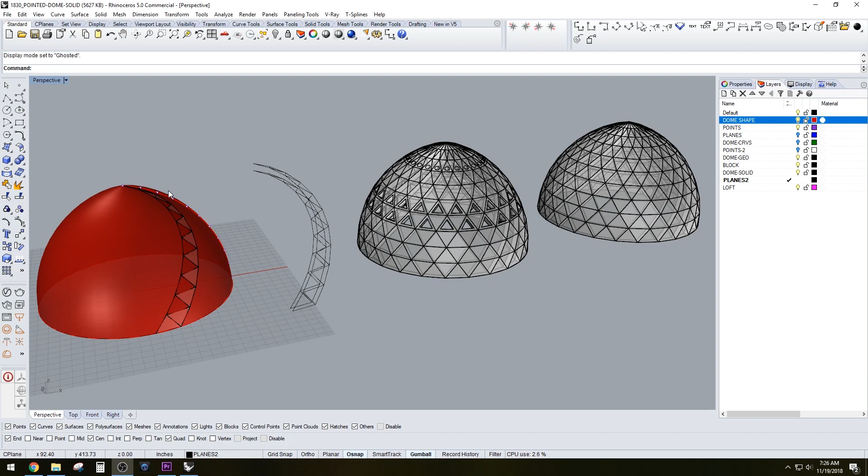Hi everyone, in this video tutorial I'll be going over how to create this pointed dome that is created from a segment that is then offset to create a solid, watertight design.

Let's create a profile and a rail to sweep around to create the geometry of the pointed dome. So let's go to 0, 0, 0 and make it a 20-foot dome, so 120 inches.

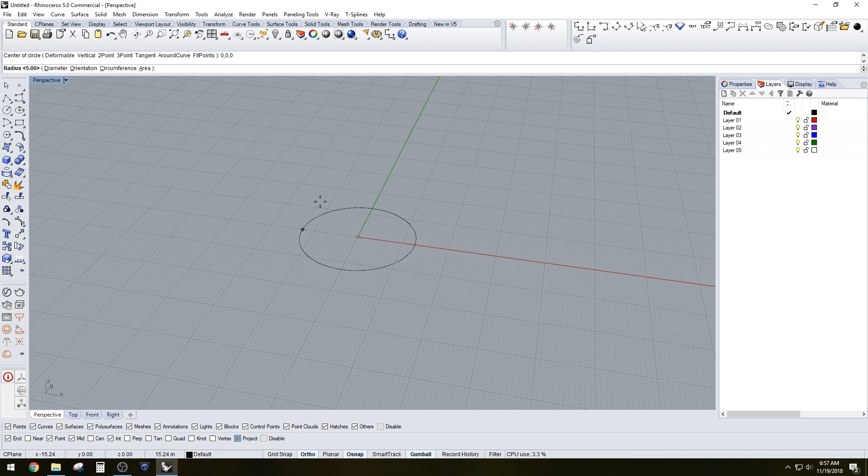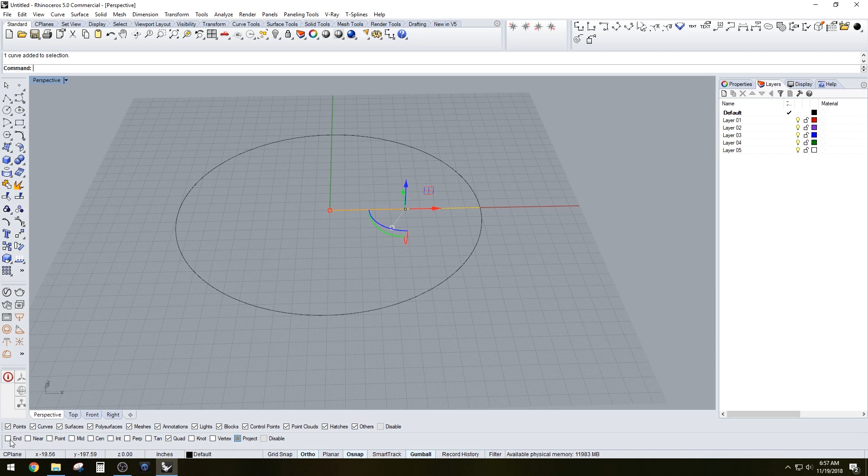Let's create that profile by going to the center layer and also going to the quadrant. I make sure to use these snaps a lot and change them up, also changing the project, because those are really useful for making things accurate and doing certain tricky things. So yeah, that would be project.

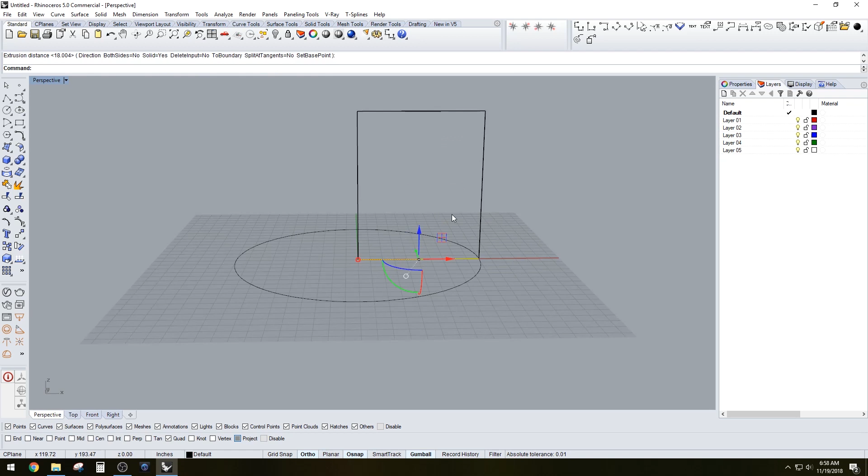Let's extrude this curve and create the height of that dome, which this one's going to be a little tall because I want to make it pointed.

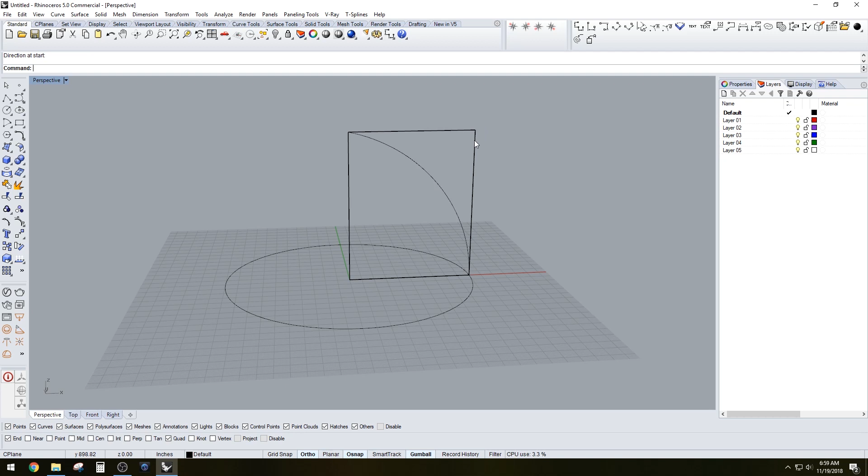Arc, start point here, end point here. Oh, I messed that up, because I have the project on, so let's do that again. Start point, end point, direction - because if you don't put direction, it'll create that center point in the corner. So you do D space and it'll act like a vector direction. That's how I create that profile, so there's no curves going out.

That's something you don't want to do - you don't want this curve to ever bulge out, because that would make it trickier to develop. I like to keep it going in.

So now that we have that, those are the default. Let's go here and do the dome shape. I'm going to make sure to add all these models for you to download.

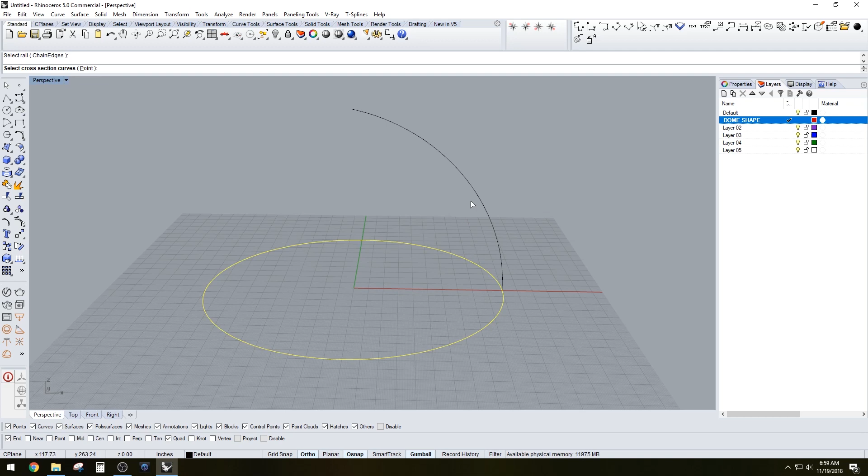Let's go to sweep 1, have that rail selected, or if you don't have it selected, go to sweep, select the rail first, then directly select the profile curve. We can go freeform - there are different options you can see here.

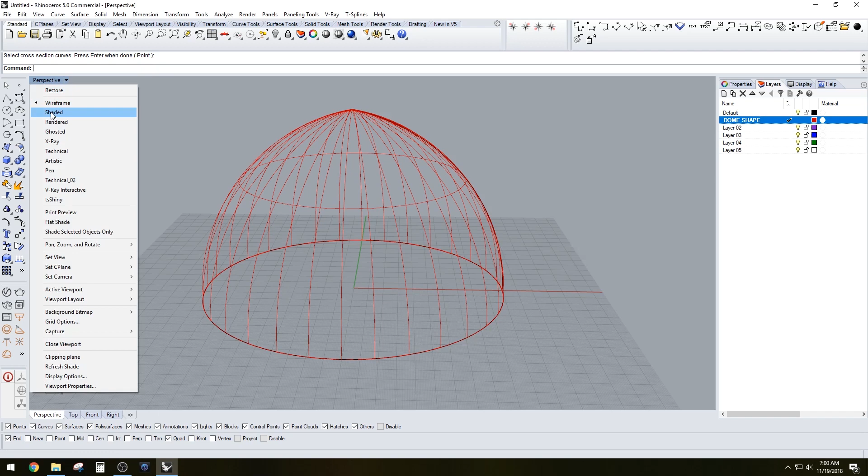Freeform seems to give the best results, so that's what I'll be using today. Let's go to shaded view, right click at the top left there, so I can hide that. I've done another tutorial that a lot of people liked on subdividing this dome, so I'm going to be doing that, but this one is going to be solid.

So let's go ahead and create the points. The points are going to subdivide this curve by a certain number, and that way we can pick the density of the dome.

So let's divide this curve. Hit spacebar and it'll give you the options - how many segments? Let's try 18. That seems like too much, so let's do like a 10 here. I think 10 looks pretty good.

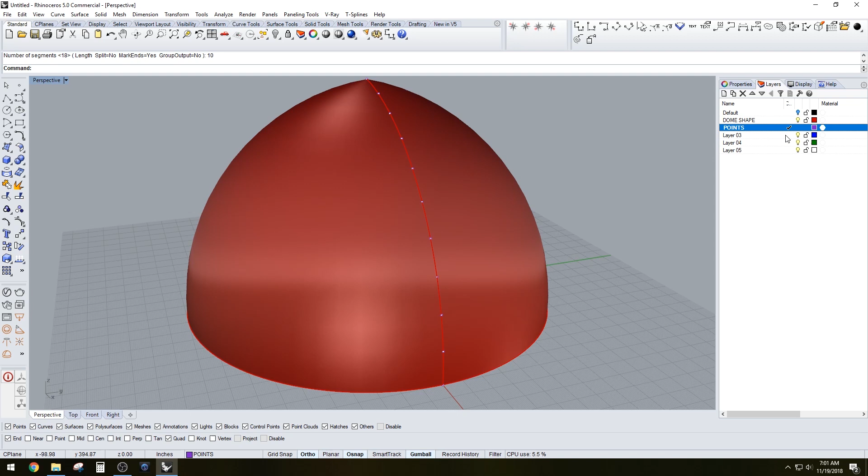Now in the last video I drew lines to project. This time we're going to do something a little different - we're going to create planes.

Let's create a plane here, so just type in plane, and make sure to create a plane that's outside of the dome, because if you make it smaller it's not going to intersect correctly.

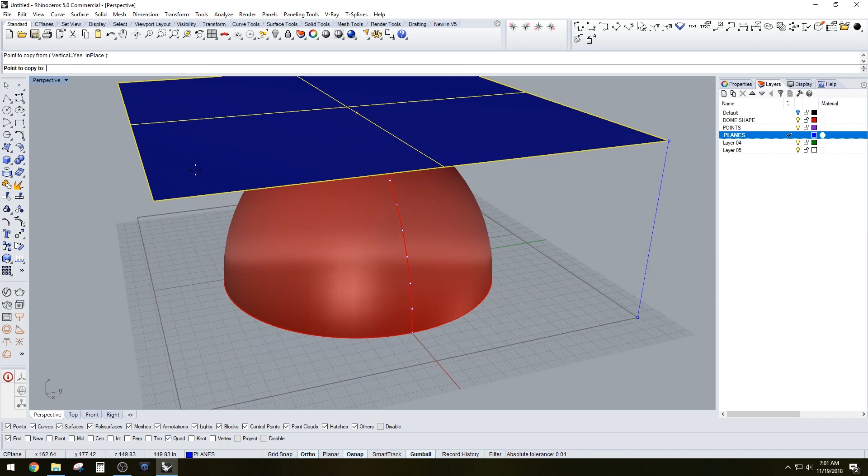What you want to do, now that you have that selected, is copy vertical - it only allows you to copy vertical even if you go here, or to the top there. Select points, and now you can go copy up 2, 3, 4, 5, 6, 7, 8, 9, and you see those planes are intersecting that curve evenly spaced.

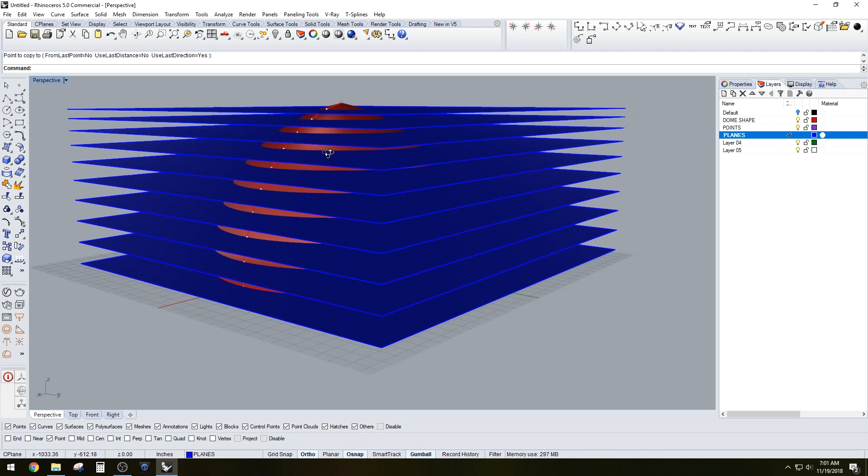So now we can go here to the curves. Let's change this layer name to dome curves.

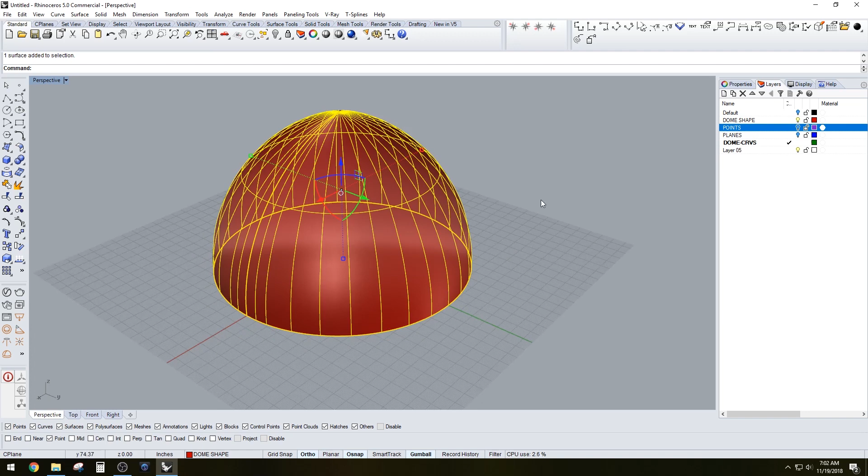We can hide those, and we can also hide this. We're going to have to take that and intersect it with that.

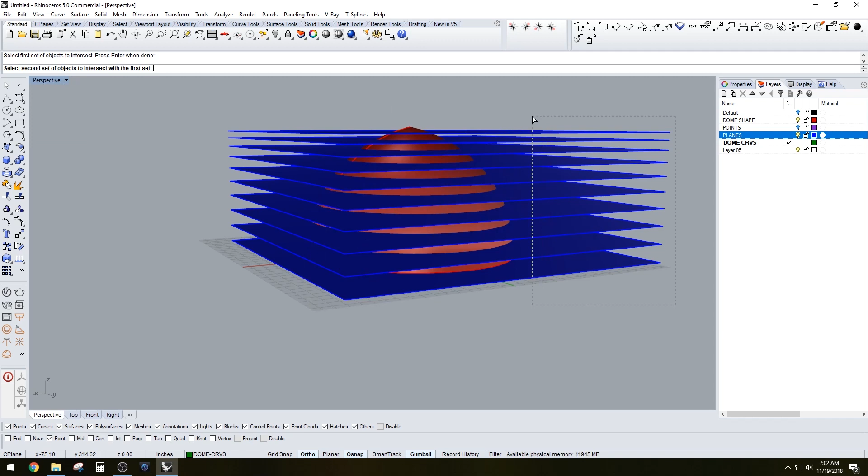Let's try the command intersect two sets. What that does is take the first set, which is the dome, and intersect it with the set of planes that are intersecting it. First set, we'll go here, spacebar. The other ones that are intersecting it, spacebar, and you'll see that when you hide that, we have successfully created the dome shape.

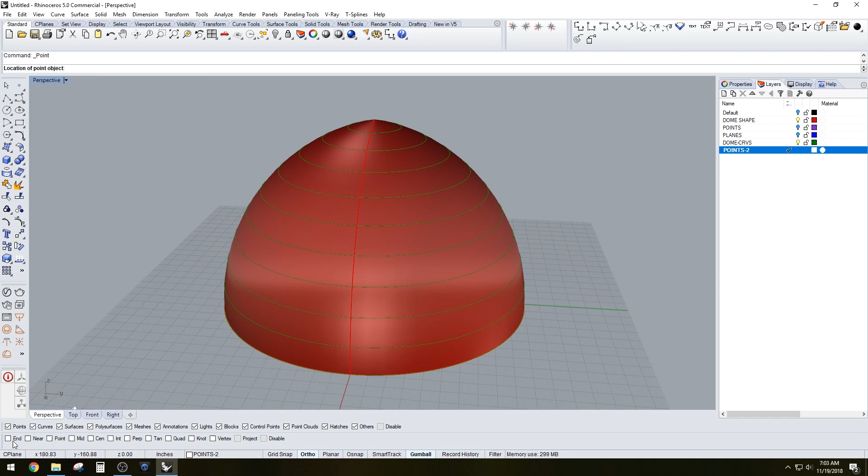Now we can go here, create points 2, because we already have a set of points. We want to put one right at the top, and we want to subdivide all of these.

Last time I selected them individually - you can do them all at the same time. Divide all those curves. The seam is correct here. How many times? 10 - that's too little. Let's do that again. Let's do 20.

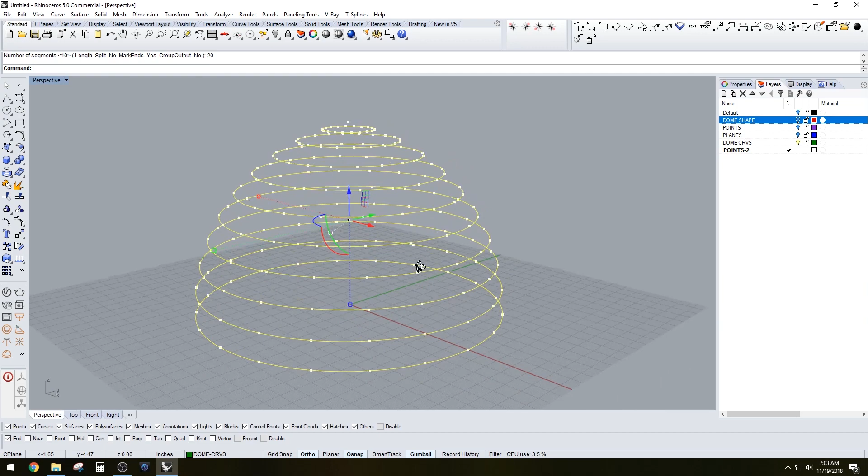Let's do that again here. Seam is correct, so let's do 20 here, and that's a lot better. So we can tell that for this dome, if we create 10 subdivisions, it's going to be more than 2 times the divisions you have to do for the circle.

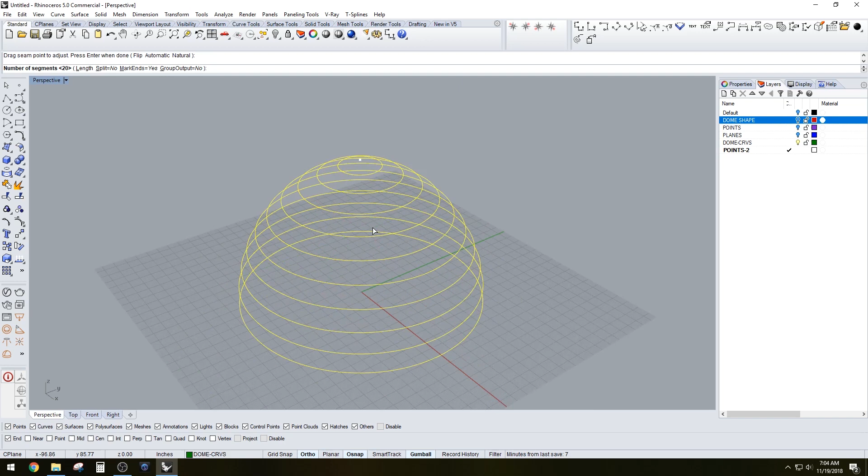Let's try that again, a little bit more dense. Divide, that's correct. 20, let's do 25. That's a lot better. You can go to the top view and see that we have all those points created.

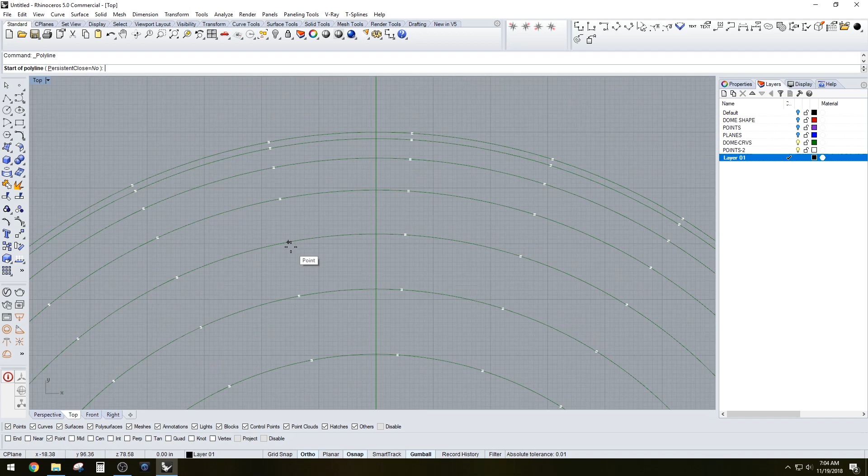Now all we have to do is rotate the alternating divisions. To do that, we go to the top view, create a project from this point to this point. The alternating ones are going to move from this point to this midpoint. Let me show you what I mean and how I do that.

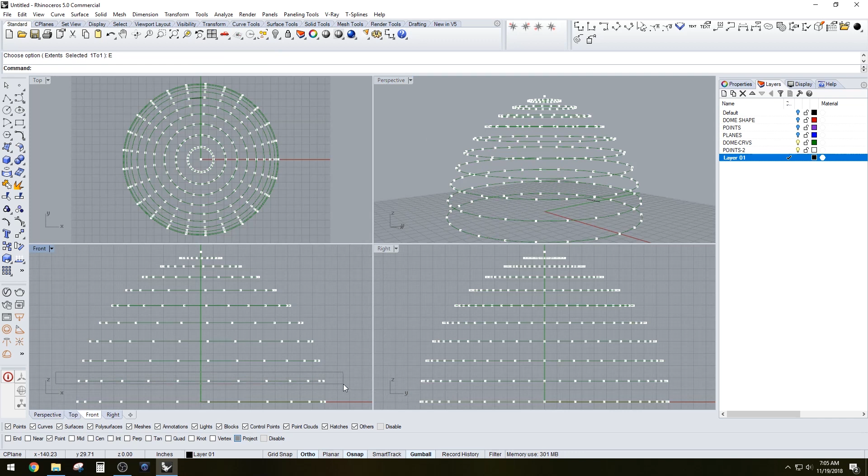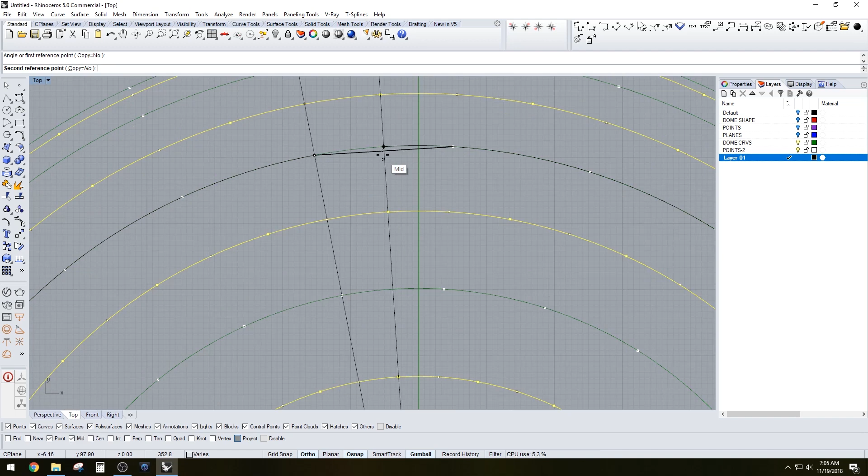Go to the side view, zoom to go to all the extents, and notice if I select these, go to the top view, rotate with no copies from here. If we move it from this point to this midpoint, keeping everything projected so we don't mess anything up, we can delete that curve, and go to the side view. Now we've created like a Christmas tree type dome.

Now we can take this layer and call it dome geo, for the geometry of the dome. This is the fun part, because from here on we are going to develop it and make it into a solid.

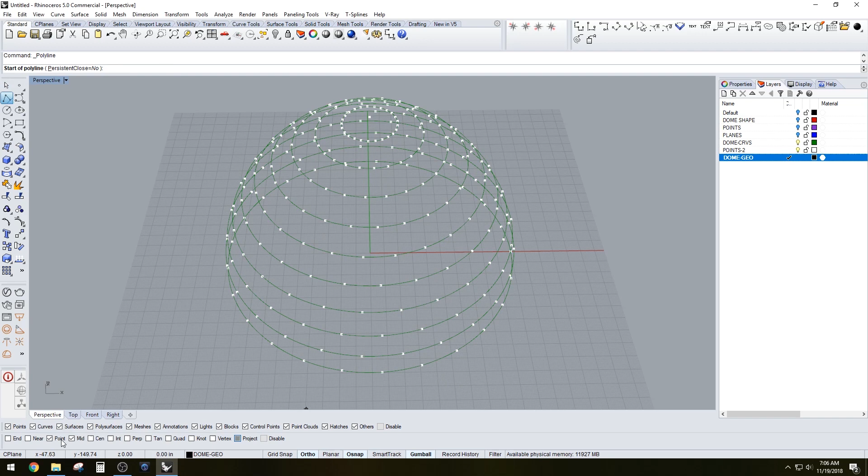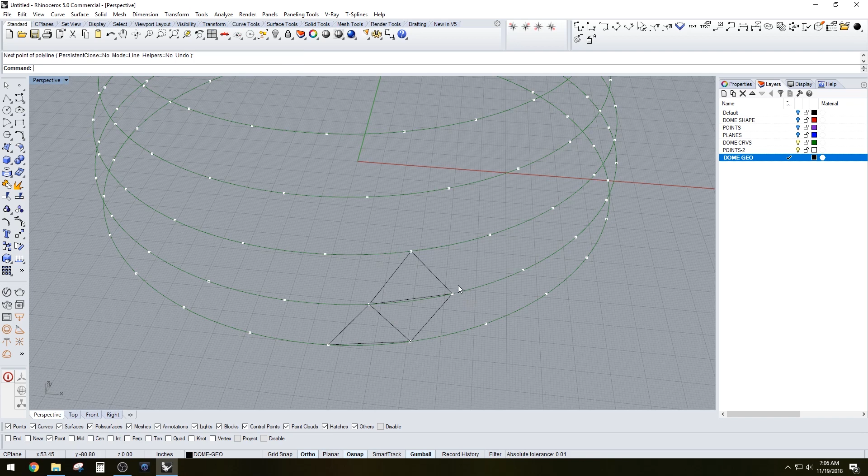Okay, so now let's start creating those triangles. Only select the points, and let's make our way around the points here. So what you want to do is go first, second, third, and then C to close. That's what I'll be doing: 1, 2, 3, close.

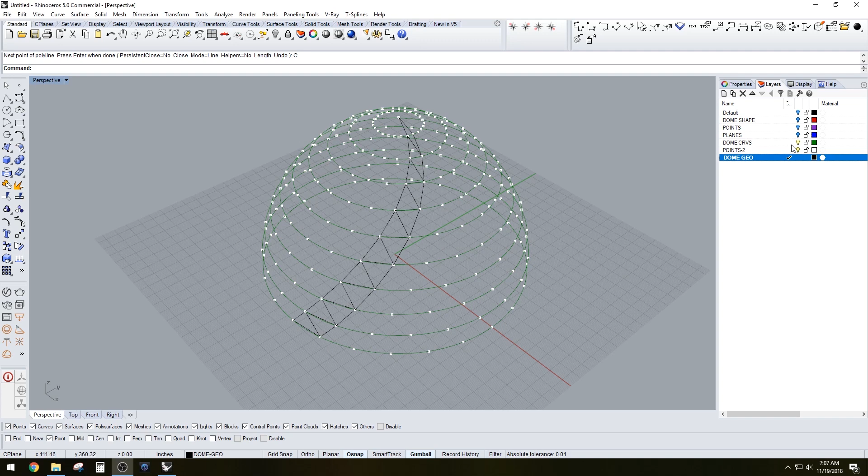Okay, so now we have those points. All we need to do is go here. I'm going to type in, create a new layer for the block. So type in block here. And we can, at this top, create that block, which is block 1. Now let's bring everything back.

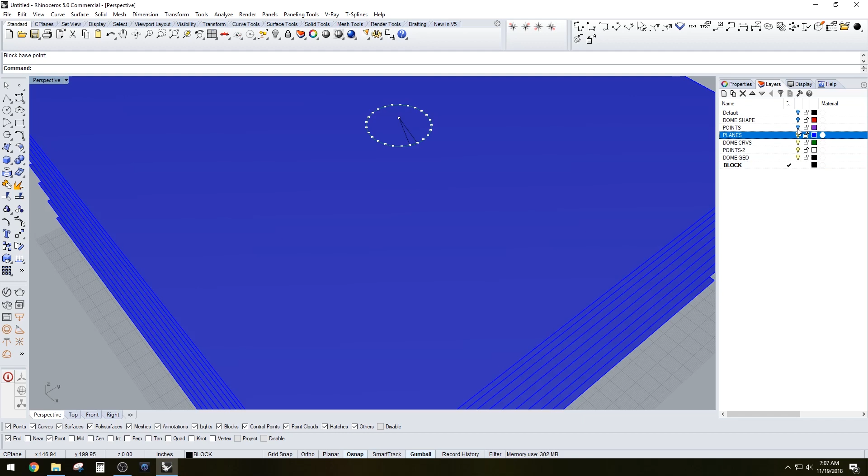We can select, we can actually keep those hidden. We don't need those. All we need is the dome geometry. But I do want to scale everything up except for that. So let's keep all the steps here.

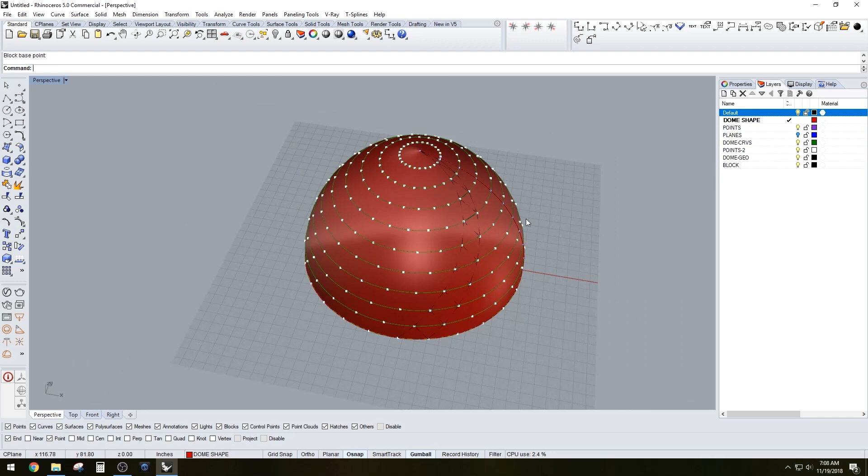What I'm going to do is copy this over so we don't mess with any of our original steps. So let me copy that here. Okay, now this is the tricky part.

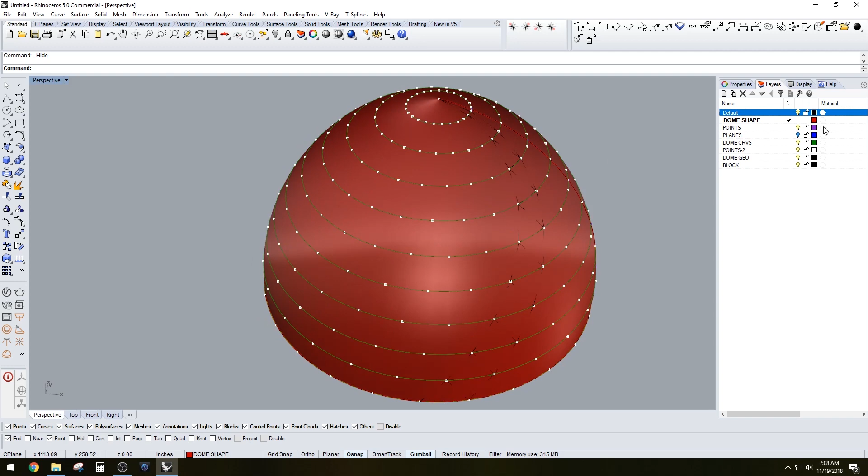Kind of tricky part, because we can delete this. Now that we have that, we can take this geometry. There's certain things that we might not need, like those subdivided points. We don't need those. All we need is this shape and that initial block.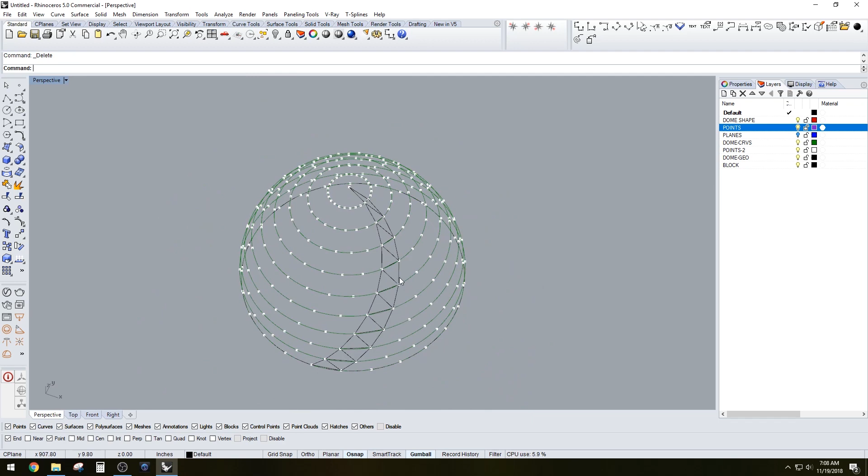Because to make it solid, we have to scale this grid of points out a certain distance, so we can loft those planes together. Let me show you what I mean.

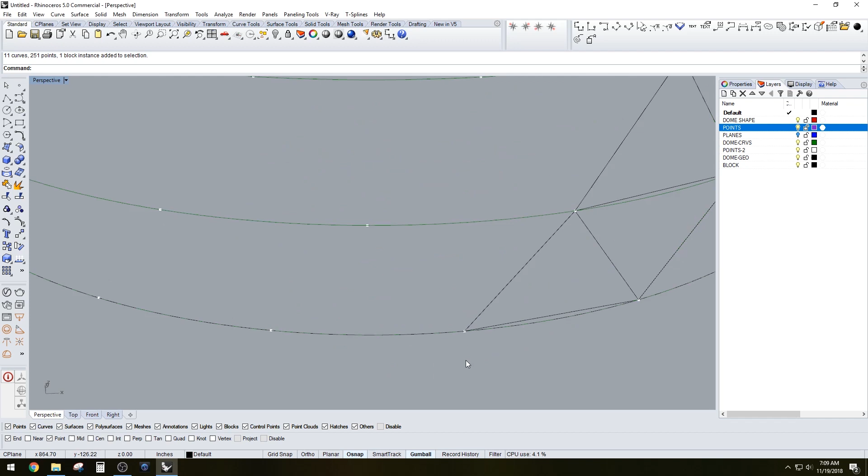So now that we have this block here, we also have this base circle. We can offset one of those circles. So let's make a new layer with a new color. I do that just to make sure I'm able to see the new things I create. So offset, let's make it an 8-inch offset.

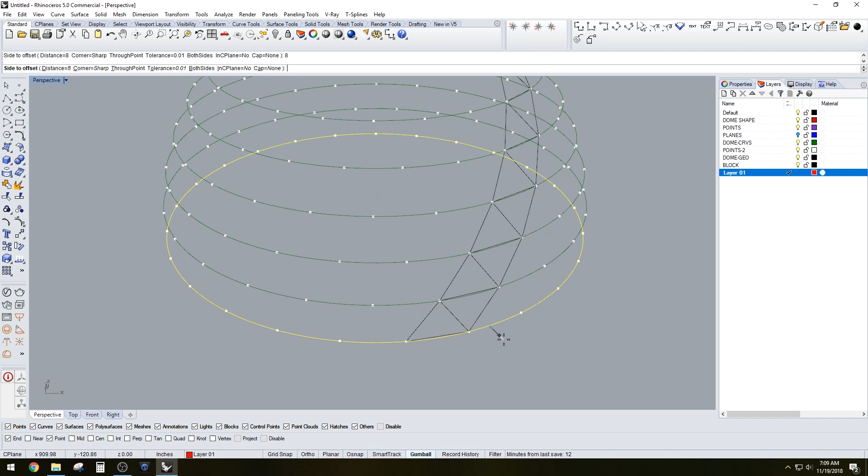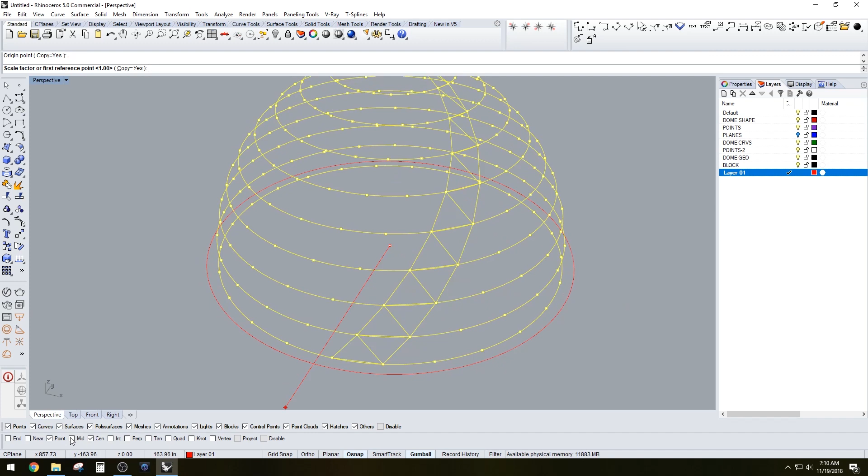Here we have that. So we want to scale a copy of all of that from this point to there, and let's do that right now. So scale, copy, that's the trick. Copy from the center point to the quadrant, which we have a point there anyway, to that quadrant.

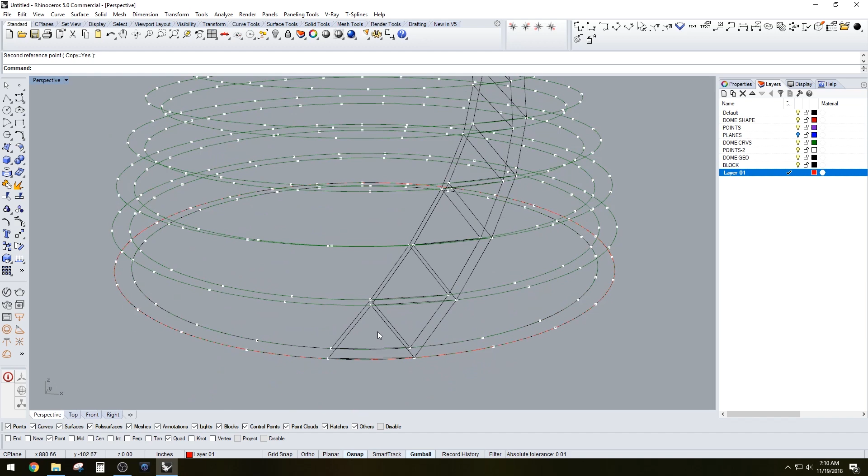And now look at that, we have a thickness to it now, which should help us if we're trying to create a solid dome, or if we want to difference some pattern in the middle here. We have those options.

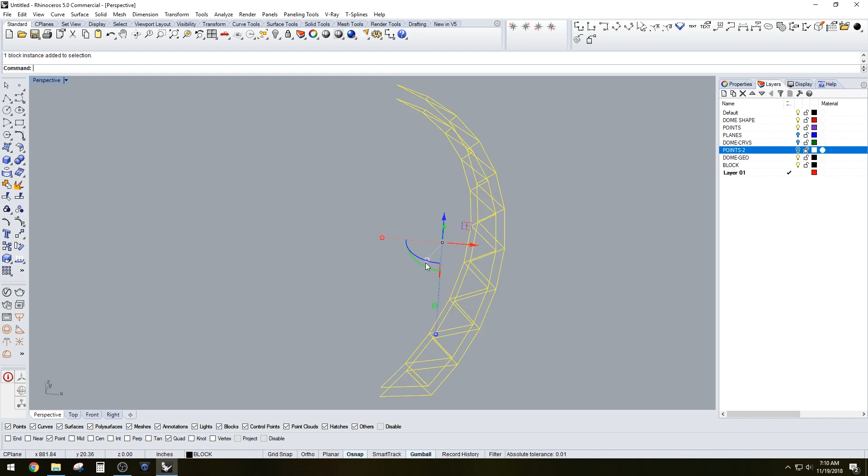Since you have this as a block, I'll show you how easy it is to hide this, and how easy it is to create that shape. So we have those two blocks, which once again we copy here and then explode.

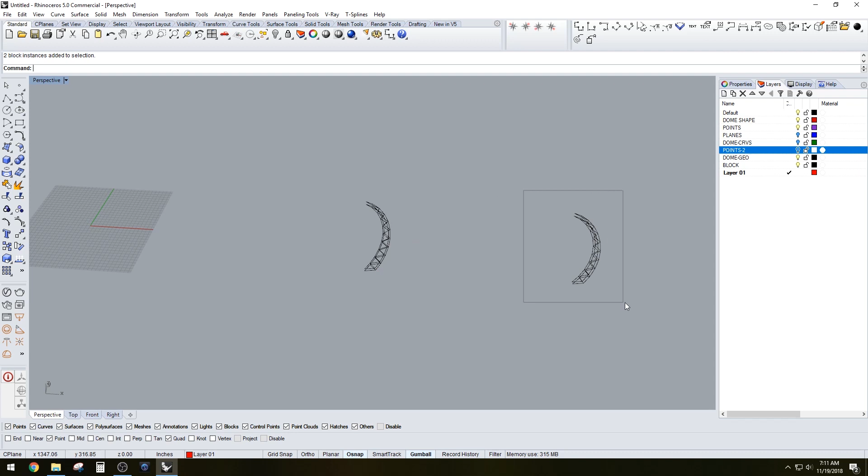The reason why I do that is because if I mess with this and then I want to get back to the original, I still have these that are not inside of the block. Since these are inside of the block, everything that I do to that will make a difference on the other one.

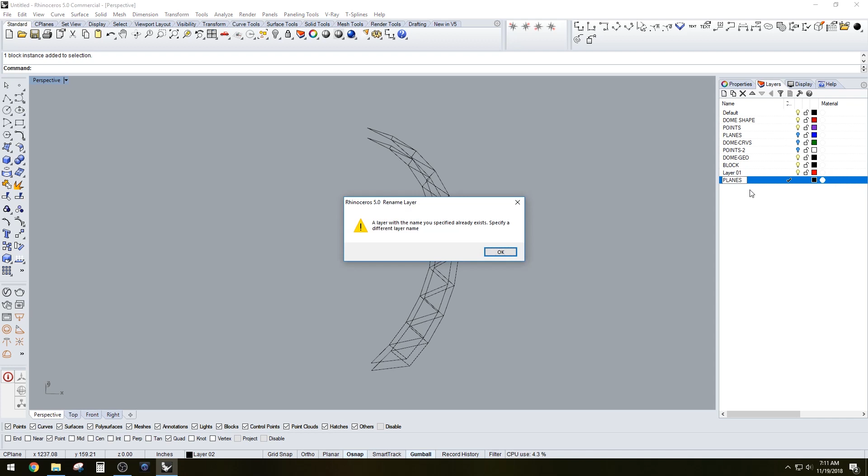So let's go in here, type in, we're gonna create the outer planes. Planes 2, and let's also do a loft. The loft will go after, we'll do the planes first.

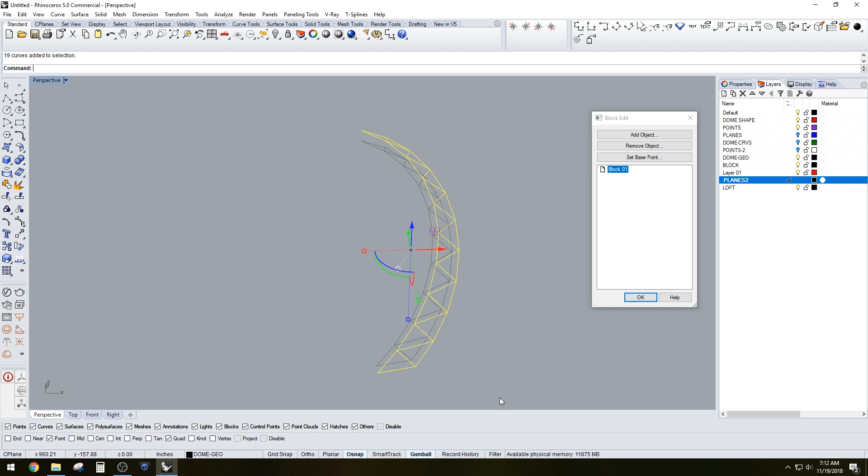So let's go in here, select all of them, and since they're all triangles inside of there, if you type in planar surface, you'll get all those planes inside of those triangles.

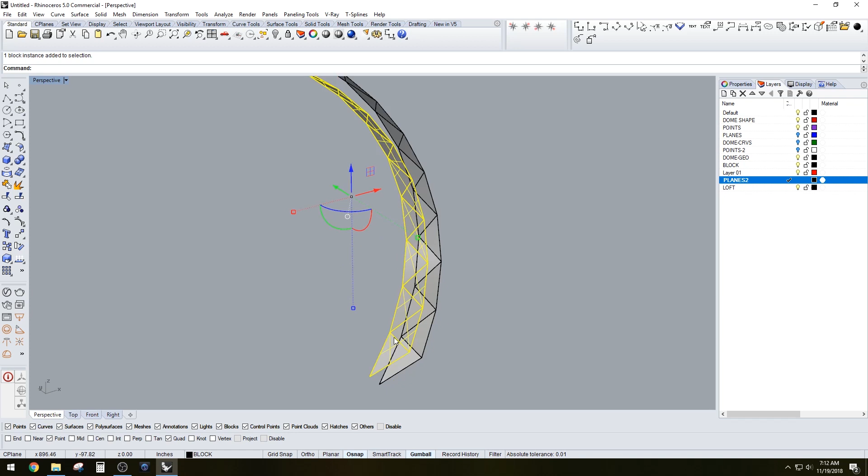And we can loft each individual one, or we can loft these two outer curves together to create that. So that's what I'm going to be doing here. I'm going to be creating that outer line, duplicating that outer line, so we can go ahead, go here and explode the block, and we can join it.

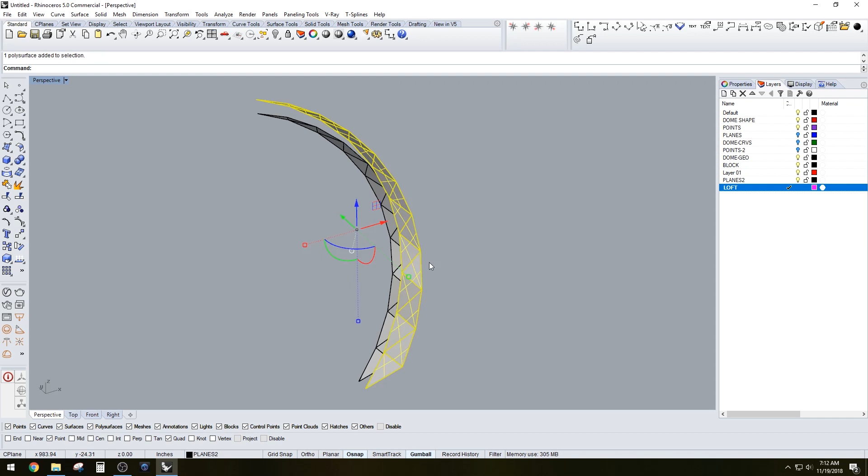So we have these, let me select these. So we have all of these, and if I deselect those joined surfaces, we can delete those curves. We don't really need them because we already have them inside of this geometry. So we can go ahead and loft together these.

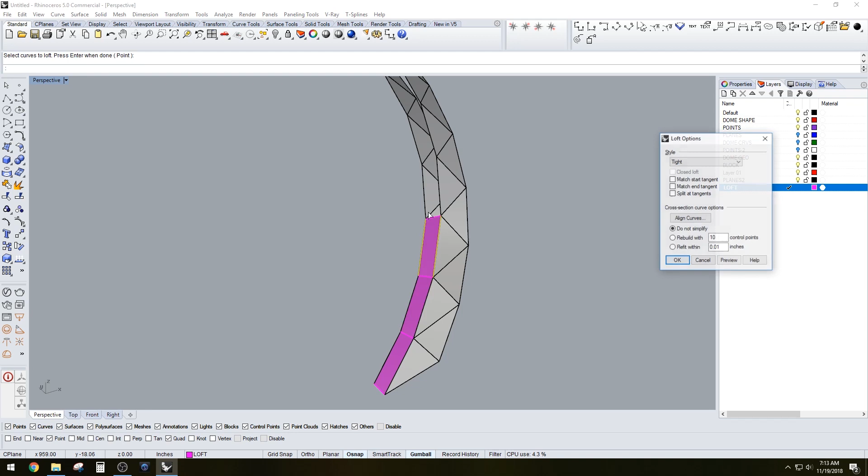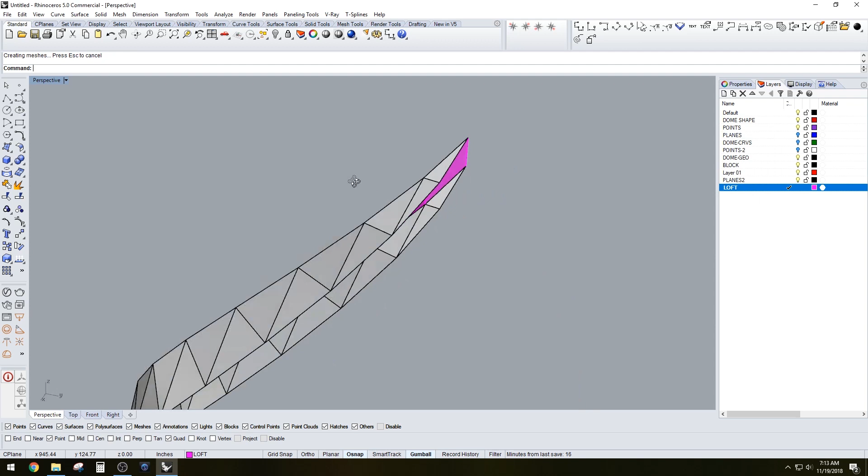One thing that's nice about triangles is that they're fairly easy to develop because there's no curves, and curves are usually what causes most of the issues when you're trying to make things into solids. Hopefully with the new Rhino that'll be fixed, but I'm still in Rhino 5, so who knows. For now, I really like developing domes like this because they work out pretty good for solid tight designs, for 3D modeling or 3D printing.

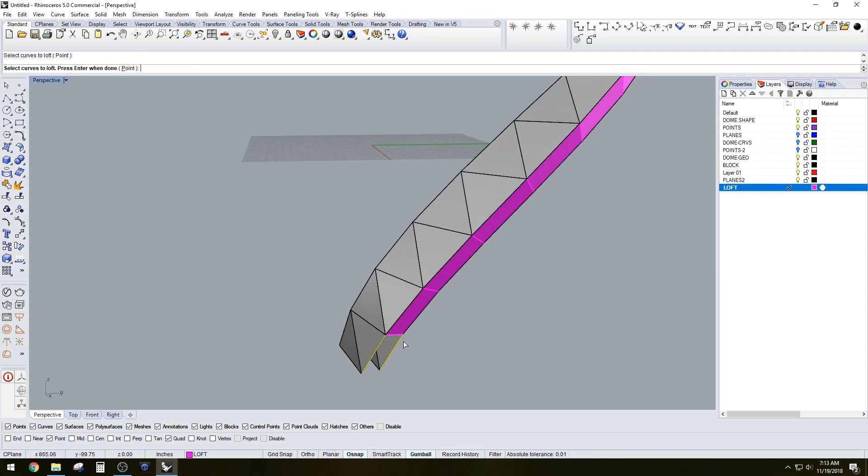Okay, here we go. Sometimes if you go from opposite corner to opposite corner, you'll get a cross, so make sure you stay on the same side. That's one little trick that'll help save you a lot of time.

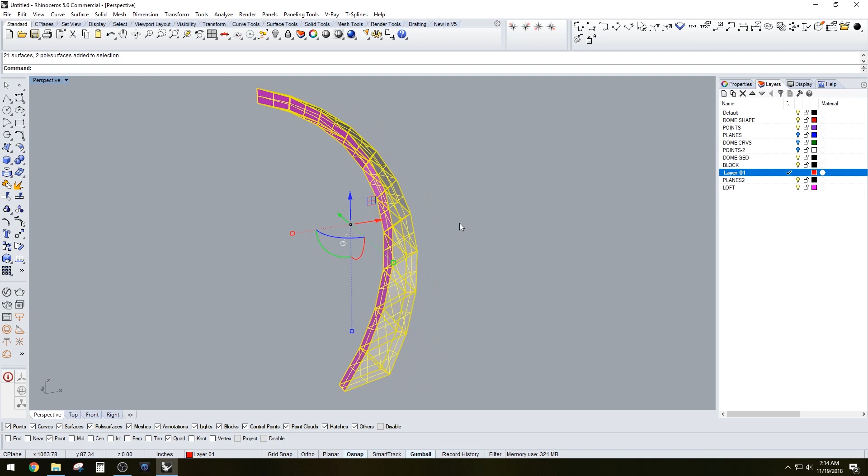So if you select all of those, let's go here to that red one. Select all of those and type J for join, then change object layer. Now this is a solid watertight section that we've created, and that's literally all we need. That's it, that's the whole dome. It's a little snake going up.

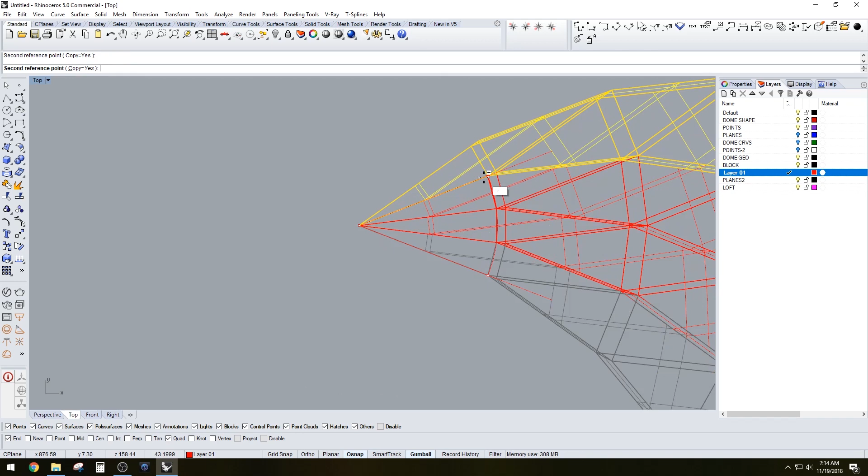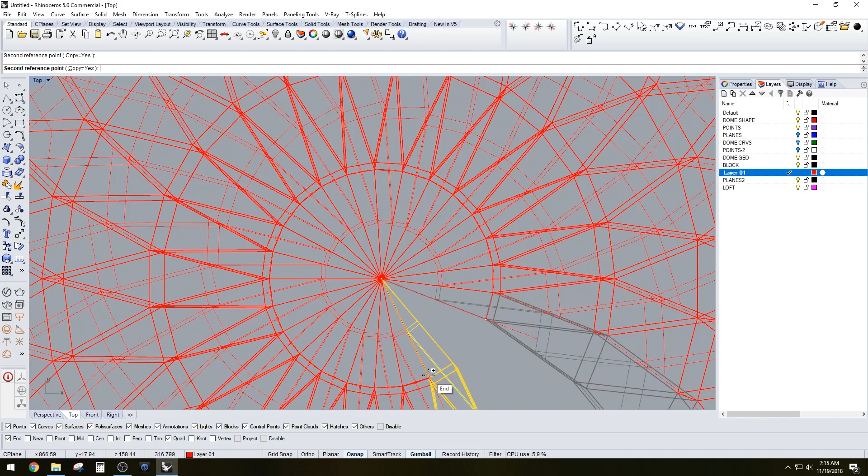Let me show you what I mean. Go to the top view and just start rotating with a copy. So let's go here, endpoint, just make sure once again you make a copy, and make sure that you're not overlapping, or that it's a good point you're copying to, because sometimes you might overlook it and it will cause issues if it's not perfectly on a snap. So I'm even taking a risk here by going to an endpoint—I should be going to the points that I projected, because those are more accurate than sometimes overlapping surfaces.

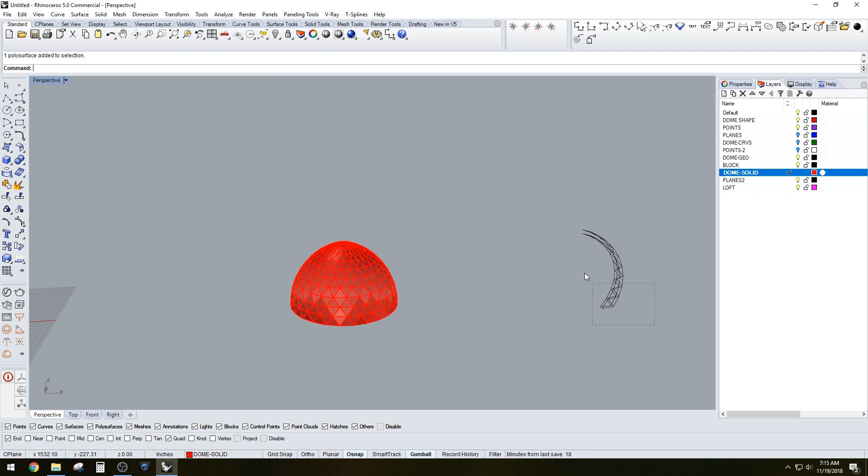So let's go here to this top view, and now we have the dome solid. Boom, all of those are solids. Now if you wanted to, we saved that because we might need it again. We might even take those and turn them into pipes, and then we have our base geometry if we want to mess around, make it taller or shorter. So that's the way you would create a solid watertight dome.

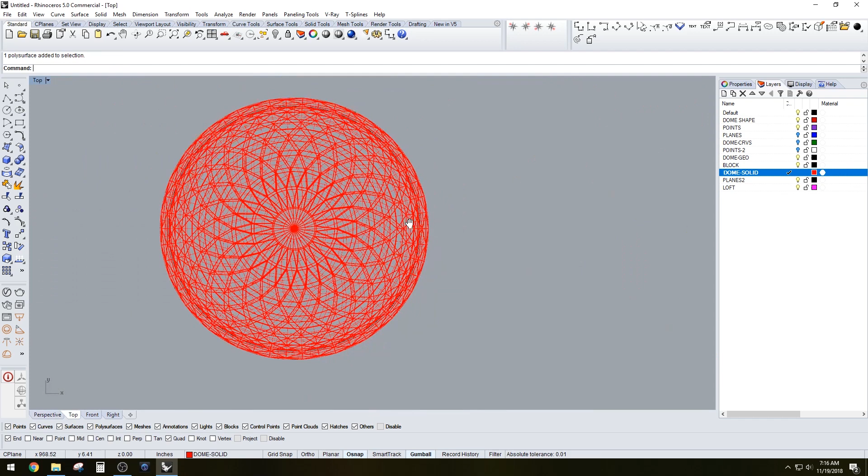So Boolean union—actually before I do that, I was gonna union it, but then I realized, you know what, I'm gonna go to the top view here, and I'm gonna make a copy of that so I don't lose it. Then I'm gonna Boolean union this together, and let me show you the effects that it can create.

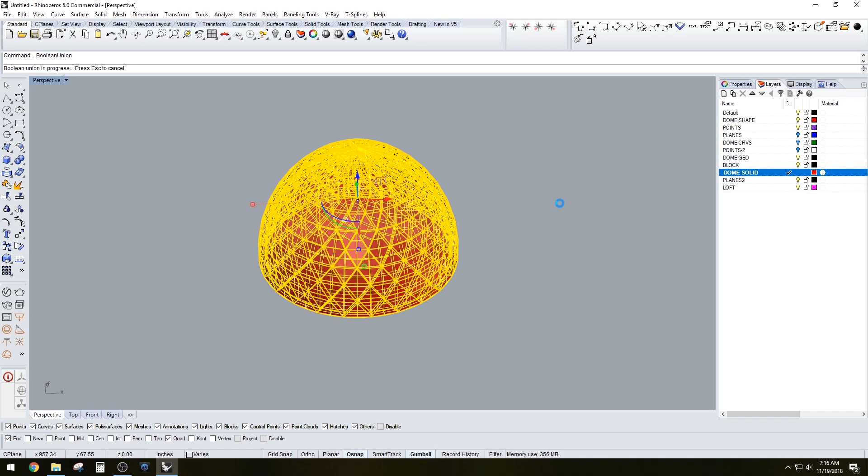Because once you have it as a solid, you can do other things you can mess around with. See, it's a perfectly solid dome. Now if you went back, and instead of—let's see, I'm going to deselect one. If you go in here and create, is this a block? No, this is not a block. It's a closed poly surface—it says there, closed poly surface.

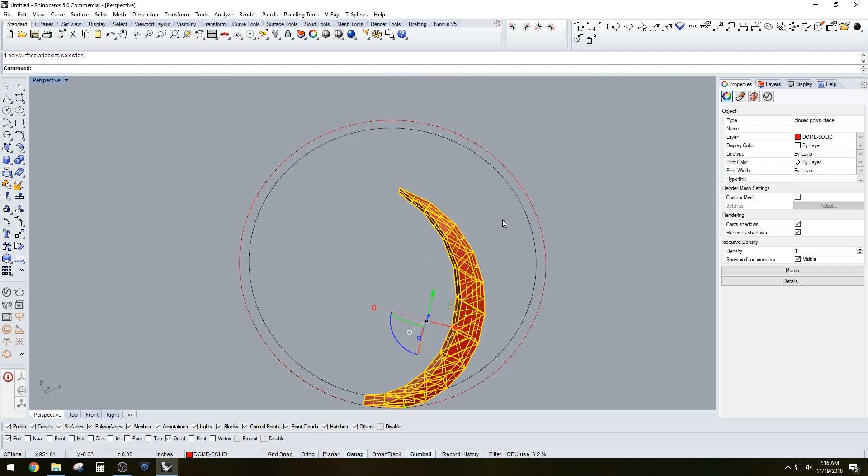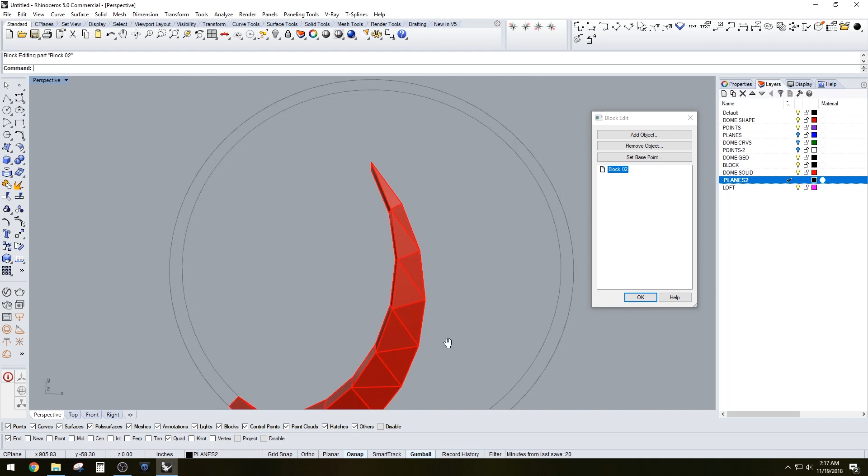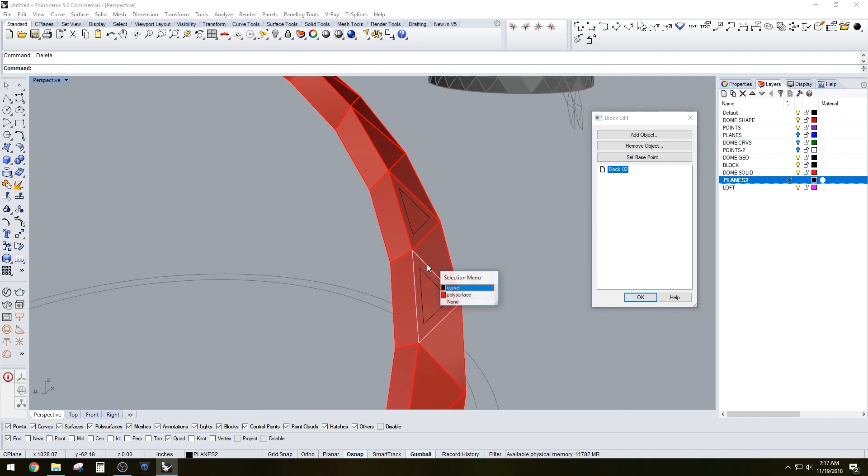So if we wanted to, we could create a block of this and call it block 02. And here we can even do something crazy, which is duplicate the face, and duplicate the face again—I guess we can do a couple of them—and then we offset this curve. We offset 3 inches, and naturally it's going to want to extrude perpendicular to the plane that it creates. So let's extrude this.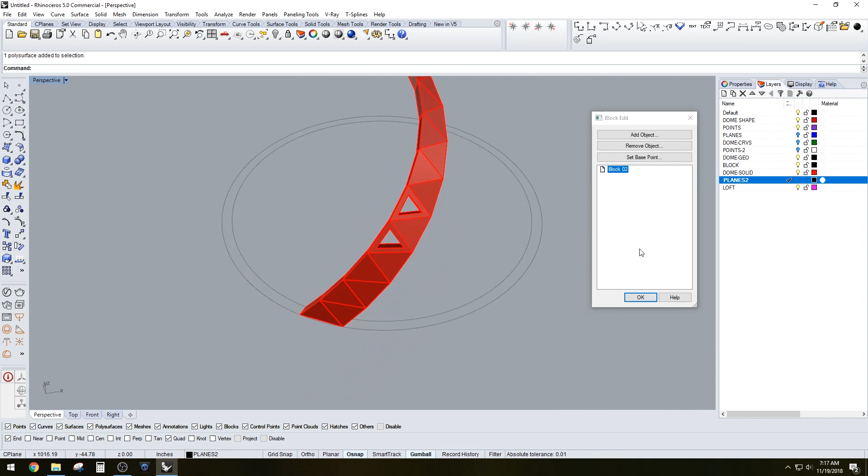And so if we difference these, we are creating more of a transparency now. And this is something that if you also wanted to 3D print, it should be watertight solid. And since we have those as blocks, we can rotate these and get that.

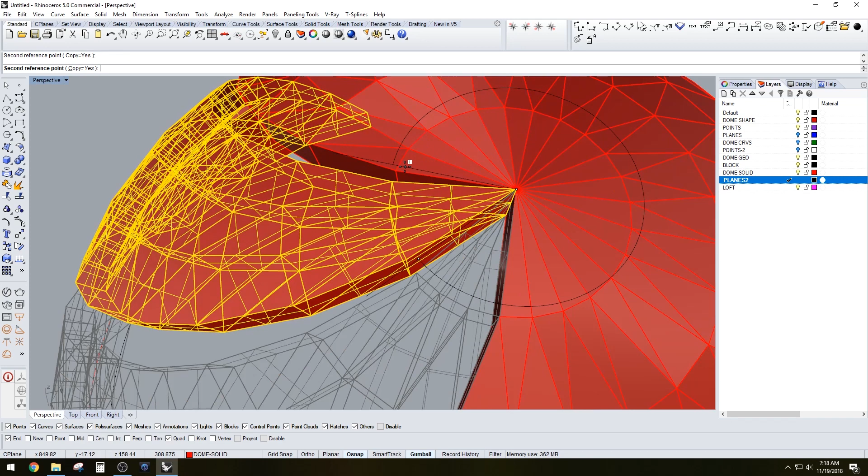I am gonna make multiples of that one just to see if I can get quick response, quick copy. See, now we've created a little bit more of a transparency, and we can select duplicates. No, there's no duplicates. Okay, we can take this.

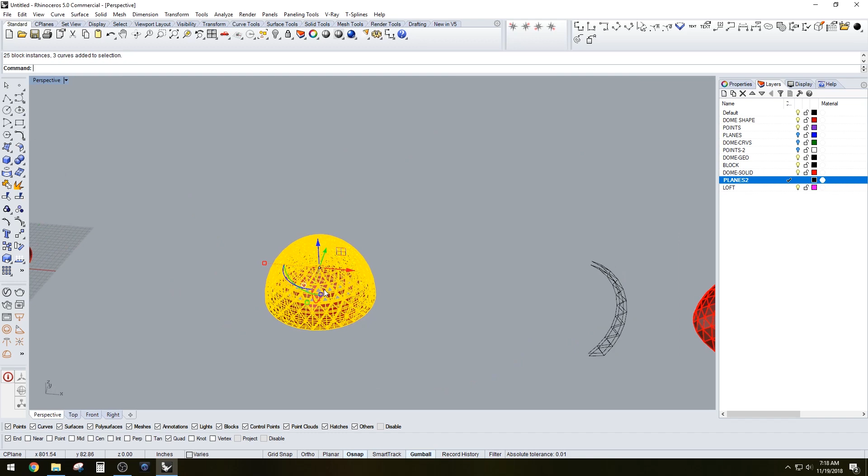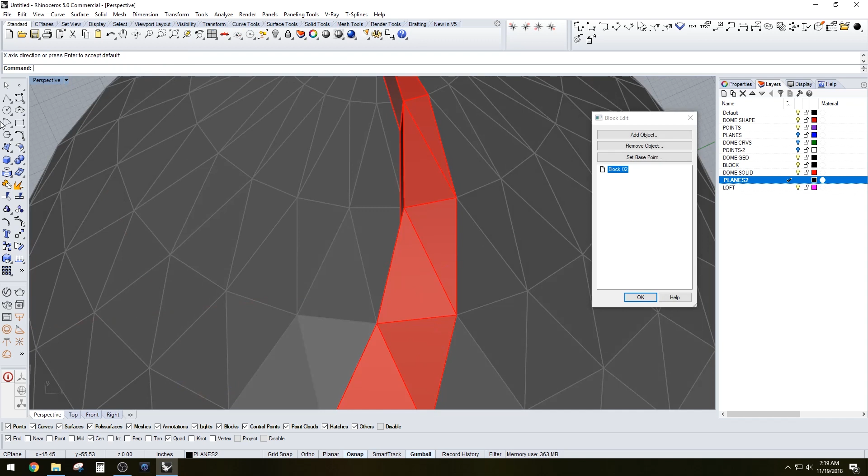We can explode, or we can say, okay, we have this dome here, we have all those openings, but I do want to also have an opening along this one, but I don't want it to be a triangle, I want it to be a circle. So you could create a surface there. We can see if we have a midpoint, a center point here—okay, I think we chose this one. So C-plane, surface, and then we can do a circle in here. We can move that around to our liking, and then we can extrude the curve.

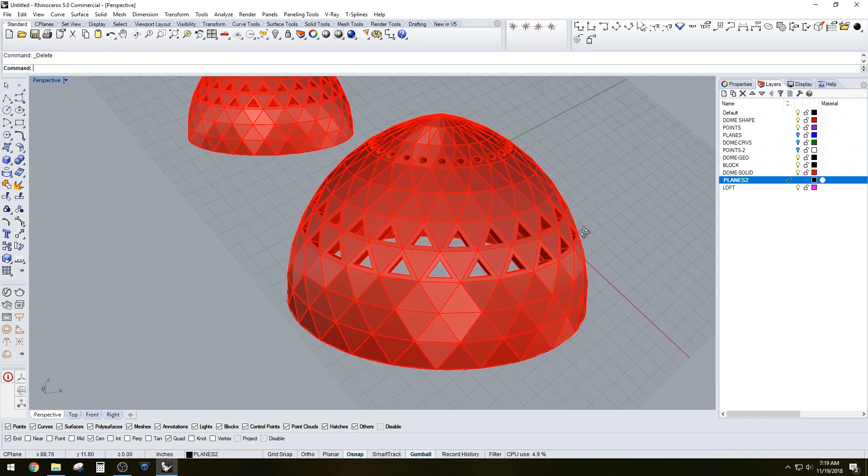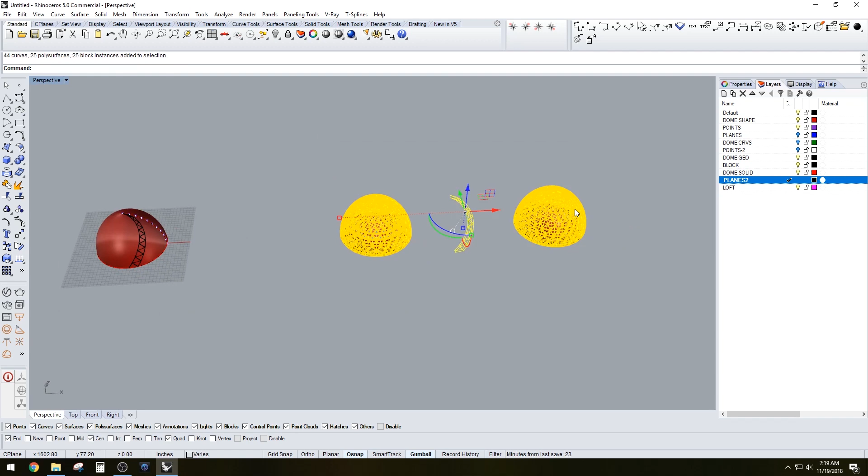Boolean difference. Okay, it has a C-plane world top to get it back, and then see, now if you wanted holes at the top, now you have some holes at the top. So that's the way to be able to create a solid watertight dome that has thickness, but also you can edit the block to create some transparency. And so, yeah, that's the tutorial for that.